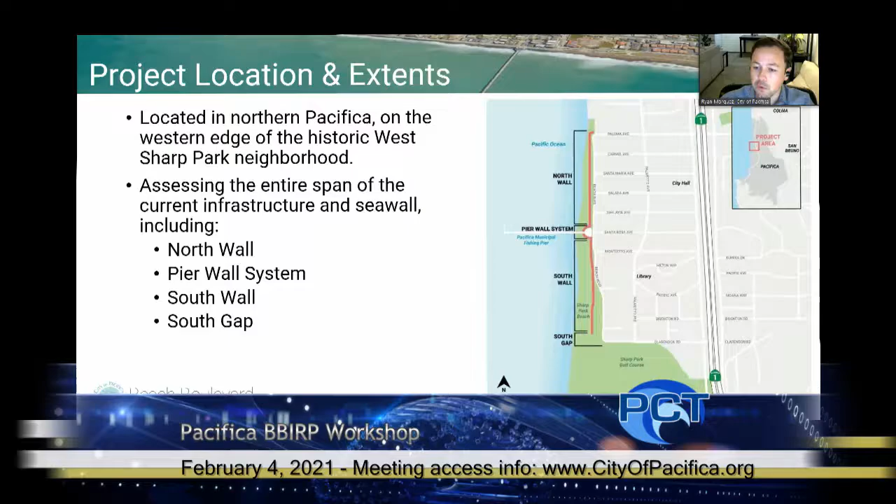Along that span there are four reaches, as we call them: the north wall, the pier wall system near the Chit Chat Cafe, the south wall south of the pier, and an area we call the South Gap or Clarendon Gap, which is without current protection, located between the south wall and the Sharp Park berm.

As a quick reminder of the project goals: to replace the current seawall and outdated infrastructure, to build resilience into one of the most vulnerable segments of the city's shoreline, to improve public access and use of Beach Boulevard and the promenade, and ultimately to create a multi-benefit solution to protect public infrastructure, recreational activities, homes, businesses, and the community at large from further coastal erosion impacts.

As a reminder of how this phase of the project is broken down: we are in the preliminary planning and feasibility phase, where the goal is to identify a preferred alternative. It's broken into three main tasks the team has been working on: reviewing the existing conditions of the site, looking at the hazards and future conditions, and using both to inform an alternative analysis where a variety of treatments for the area could be utilized.

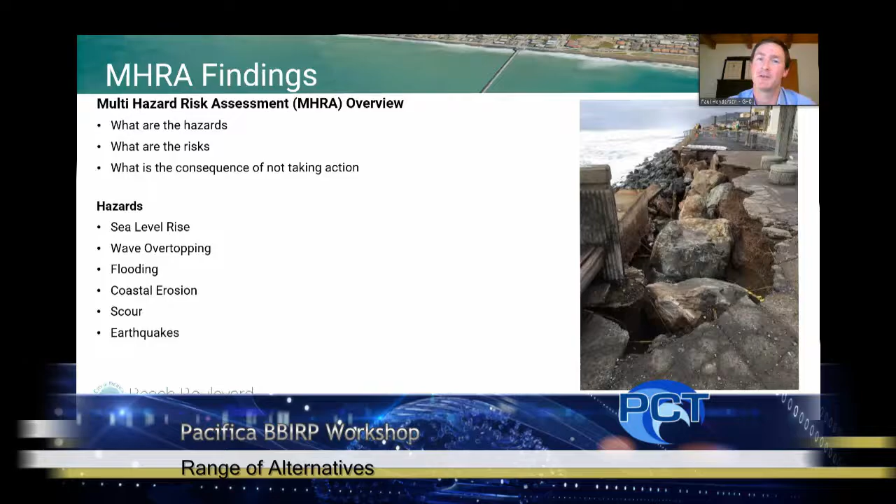Coastal erosion is generally caused by wave action, and we have examples on the bluffs to the north, where many properties have been removed over the years and the bluffs are clearly moving inland. Right now at Beach Boulevard, we have the seawall and a rock revetment, which is stopping coastal erosion from progressing. We also have scour, which is essentially coastal erosion but in the downward direction rather than inland. In front of the existing wall, the rock revetment is protecting us against scour at the moment. On top of these coastal hazards, we also have sea level rise to contend with, which is going to increase the magnitude of these existing coastal hazards.

We also have the earthquake hazard, of course. Pacifica is located in close proximity to the San Gregorio and San Andreas faults.

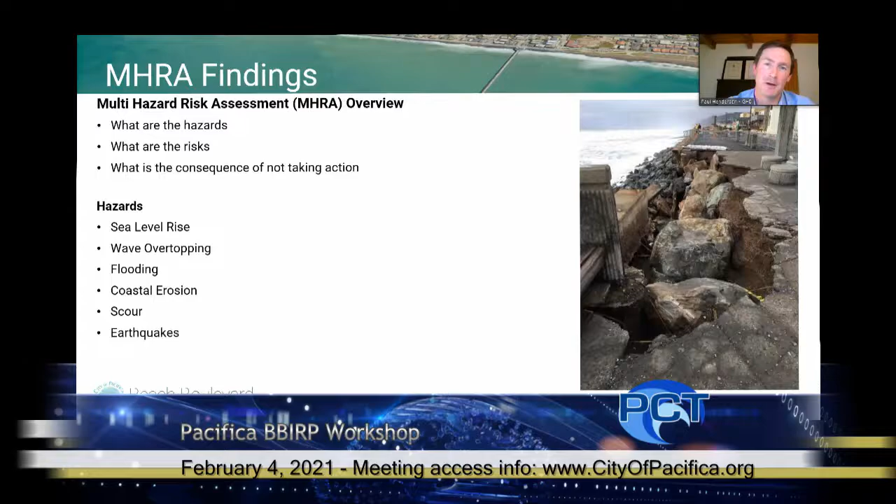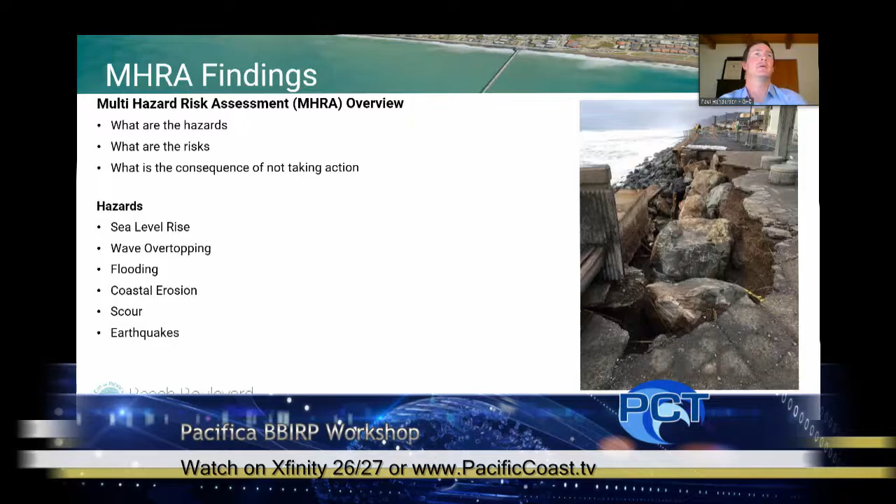The earthquake hazards specifically are physical ground movement or shaking, ground surface rupture, and soil liquefaction. So those were the hazards - that's the H part of the MHRA. We also analysed the risks of these hazards, which is the R part of the MHRA.

One of the methods we used to analyse the risks was to run a hypothetical scenario, thinking about what would happen if the current shoreline protection was not repaired or maintained from this point forward. We call this our no-project or no-action alternative.

What we found in this risk assessment was that if the Beach Boulevard shoreline is unprotected, we can expect the complete loss of Beach Boulevard by 2030, the loss of approximately 50 buildings by 2050, and the loss of more than 160 buildings by 2100.

We will also lose utilities and other infrastructure, which will require relocations, and of significance is the complete relocation of the sewer mains and pump station from Beach Boulevard to Palmetto. That would be a new pump station. There would need to be street reconfigurations and a number of other critical utility relocations.

And if the shoreline is not protected, we need to consider the pier also. Is the pier removed, or do we extend the pier landward as the shoreline moves landward? Ultimately, in our hypothetical scenario, we chose to analyse the removal of the pier sometime after 2030 because access from the shoreline would be gone, which obviously has significant costs both financially and socially if we were to remove the pier.

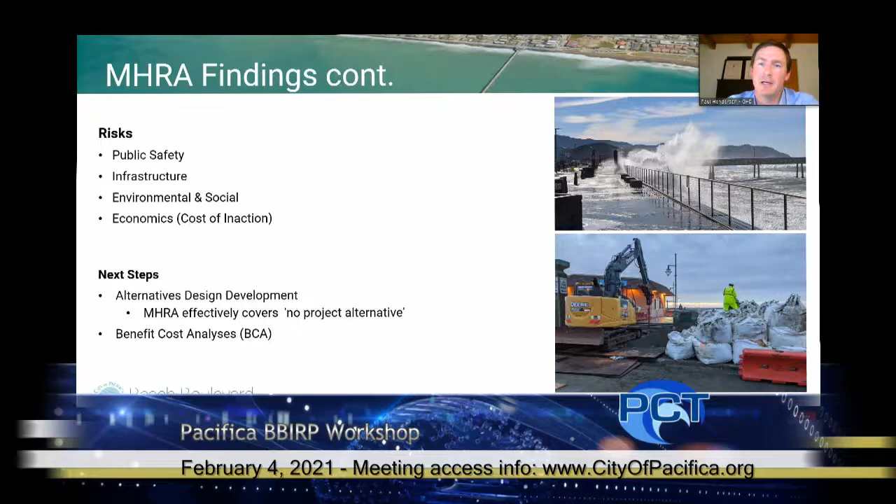And will it increase the recreation space? Will it improve the other social and environmental aspects? We'll be running a benefit cost analysis on each of the alternatives, and that'll be used as one of the tools to compare the alternatives against each other in our formulation. But I don't want to encroach on Gillian's presentation, so I'll hand you over to her to present the design alternatives and how we will assess them.

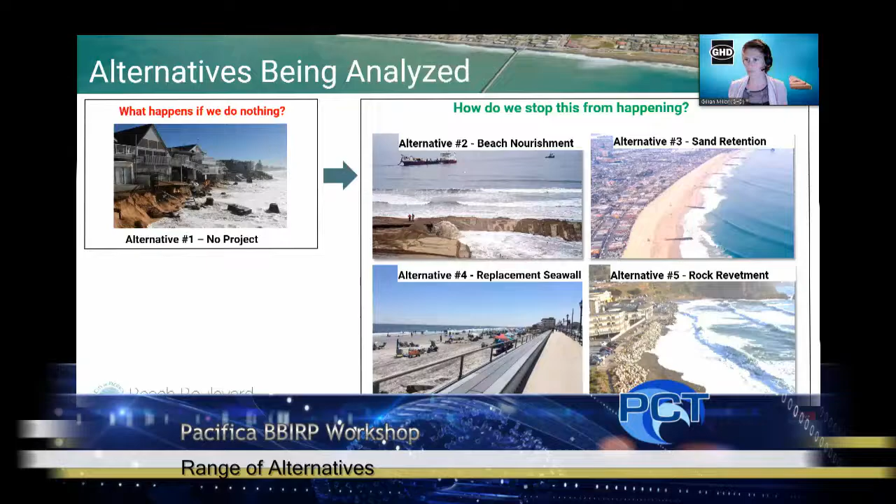I'm a maritime and coastal engineer, and I'm going to take us through these next few slides, talking about how we bracketed the alternatives, including no project, which Paul has just taken us through so well. What I want to emphasize is that we're not considering these options in isolation or in a vacuum. They are interactive, and there are elements of one that may come into the other.

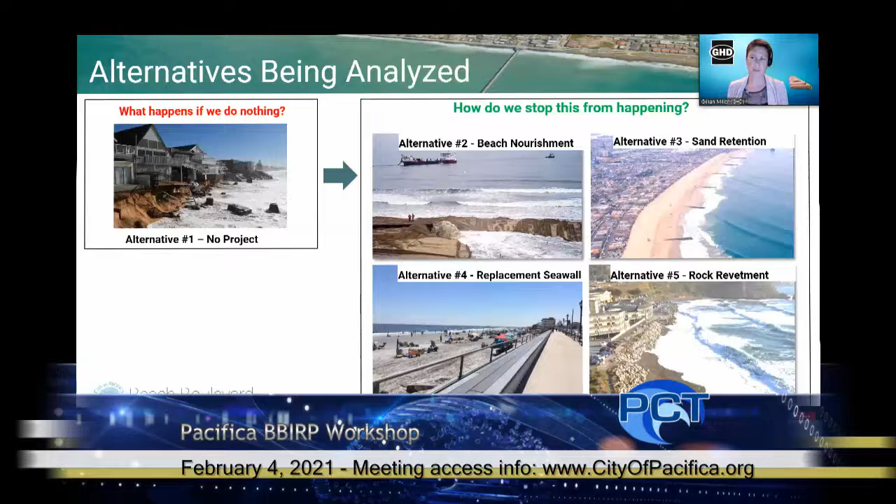For example, we've got beach nourishment and sand retention structures. There are options, and as we look at these, we can consider all the different ways in which nature-based solutions and living shoreline concepts can be incorporated into these broad categories. So we are breaking them down, as you see there, but I want to emphasize that they're not in isolation, and we don't just see one as a definitive, that's what it is.

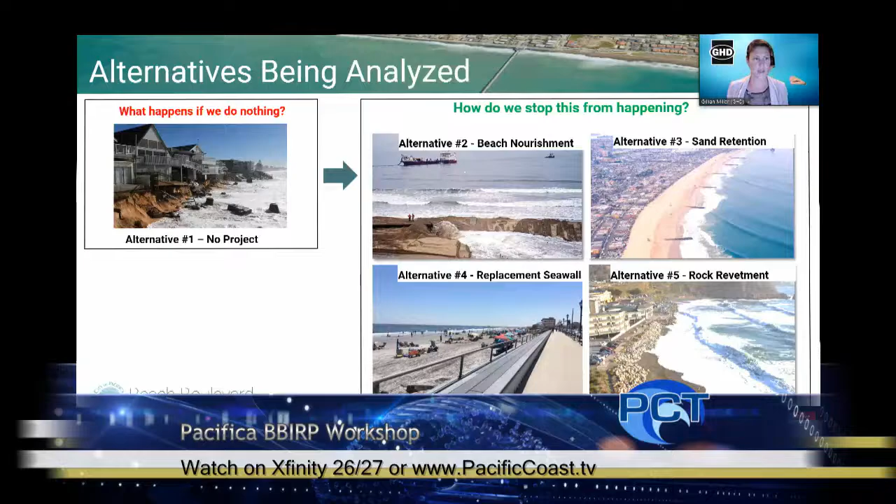Coastal defense for Pacifica is all about risk management, right? And it's about evaluating the feasibility of those alternatives. Next slide, please.

Before we dive into those, I really want to note the evaluation and selection criteria. What matters? It's set for technical performance, which, that's it for people like myself, engineers - that's where we feel most comfortable. But there's of course other selection criteria that are just as important.

Number one there, of course, is cost. It matters, right? It is a consideration. It really does matter, not just the capital cost of installation, but that whole of life cost - what it costs to maintain, what it costs to keep coming back to. That's very important for the planning, the feasibility, and I'm sure it's very important to you all.

Safety, right? Safety is something that we all take very seriously, I think, especially these days in the strange world that we're living in. And that's everything from pedestrian safety, vehicles, that you still feel safe to access your public spaces and your frontage.

Environmental resource protection - it's a shared space, right? Our coastlines are shared spaces that we have to respect and consider. We consider our environment in everything that we do, and it is an element that we have to take very seriously. As we look at 4 and 5, public access, recreational value, the culture of the frontage - these are things that do matter. How you use the frontage, what's important - this is an element that we think about.

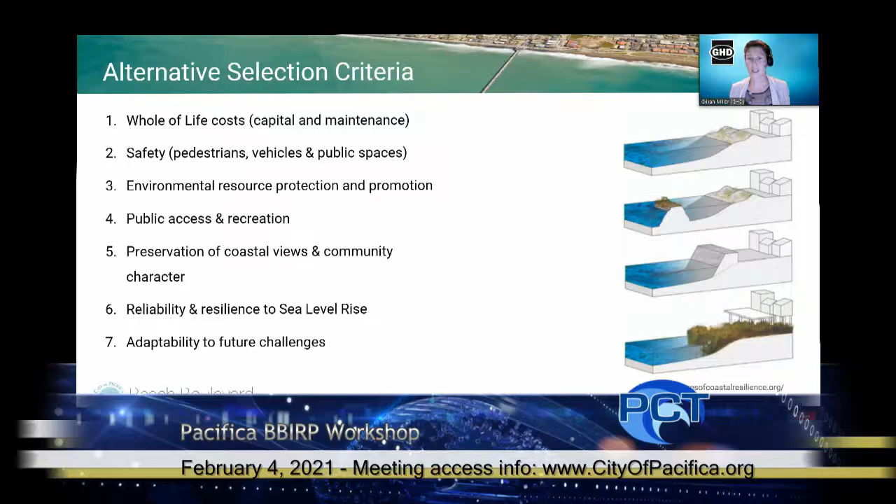And the last two there really tie in together with reliability and resilience - resilience to climate change, adaptability to future challenges. I mentioned before, on one of the questions, long-term climate resiliency at lowest cost. I think that really is what those two bullet points are: reliability and resilience - how do we look not just to tomorrow, but to years to come, and what that looks like, and how this project will react and adapt to that. Next slide, please.

So I think, Gillian, this might be time for our first poll question. Super. I'll tee it up, and I know this is a lot of information to digest, so I'll remind that the poll question is meant to get your initial feedback on what Gillian just reviewed. If the poll question can come up now, we'll keep this slide up. The question is, which of these alternative selection criteria are of most importance to you? Which are speaking to you the most after just hearing the definitions and overview from Gillian? And if you could choose up to 3.

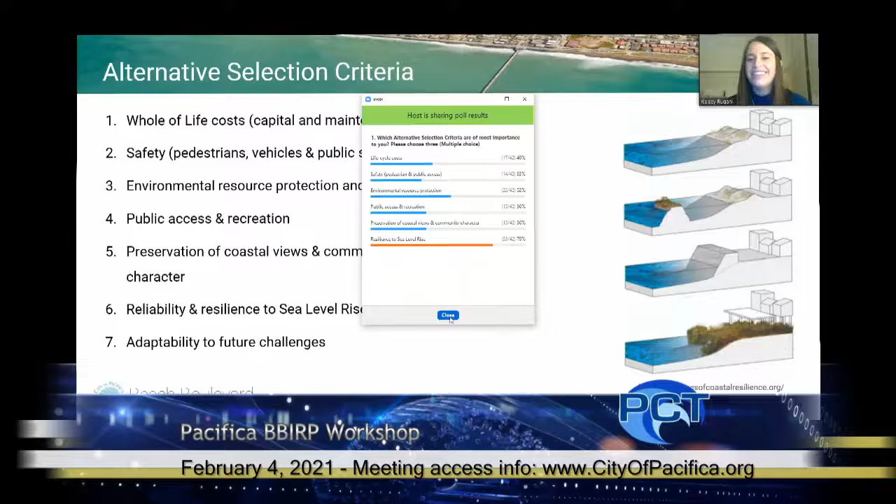What we're seeing is a little bit of a spread throughout, with resilience to sea level rise coming in with the most at 79%. The next is environmental resource protection, and I saw that one got the first vote - it went right over all the way in blue. And then kind of a mix between life cycle costs, safety, public access and recreation, and preservation of coastal views and community character. Thank you so much, everyone, for the quick input on that. Okay, Gillian, keep going.

No worries. We'll slide on to the next one.

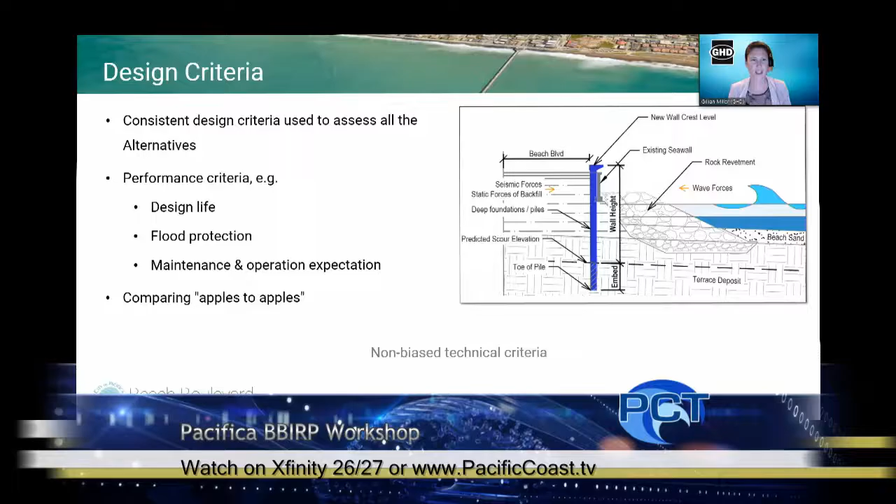Okay, back to maybe where I'm more comfortable on the technical side of things with design criteria. Design criteria is that definition of common goals and technical performance requirements. Really about the technical side. Most importantly, a consistent criteria that we can use to evaluate all of the alternatives. I've got it down at the bottom because I want to emphasize that, a non-biased technical criteria.

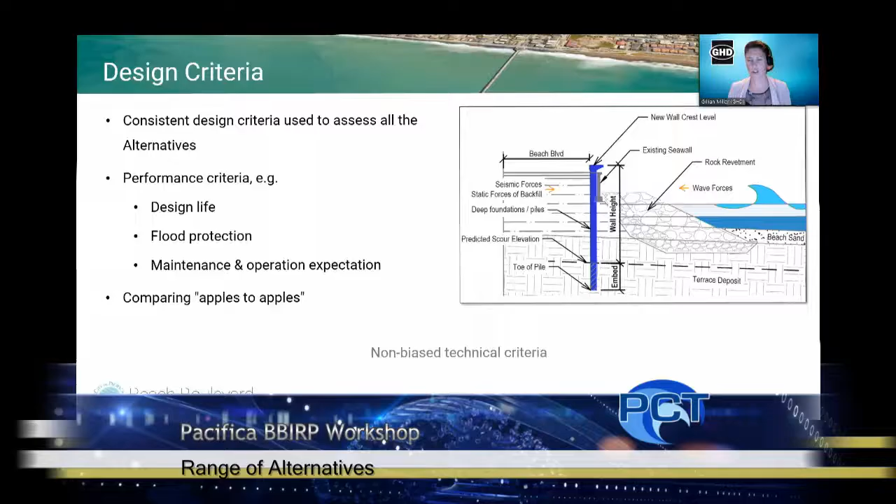That performance criteria, things like design life, how long does this have to last? What kind of protection are we talking about? What are the maintenance and operation expectations? You don't build infrastructure on the coastline and just walk away. We're always delaying and moving forward, it never stays stagnant. So these are very important, the design criteria, and it allows us to compare those apples to apples, a beach nourishment scheme to a wall. It's very important that we have that consistent criteria.

So next slide, please. Okay.

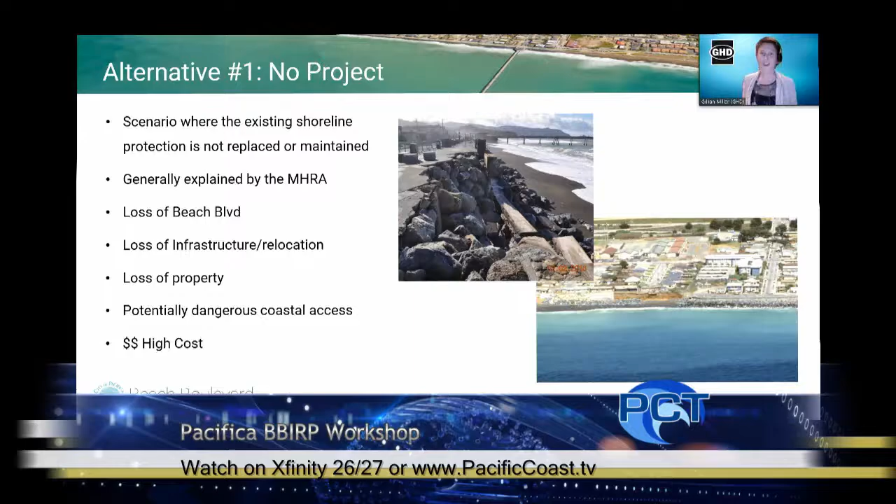First alternative, no project. I think Paul took us through very well, very concisely, what no project looks like, right? I don't think we're speculating these days. There's no mystery to what might happen to Beach Boulevard if there is no project. I think this winter has shown, amongst other events, what that really looks like. So looking forward, I think we can move straight off that slide and on to the next one.

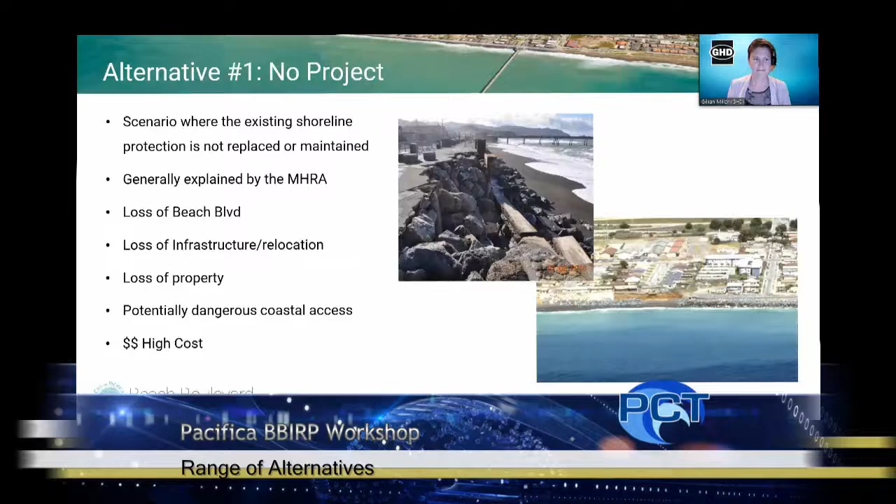Undoubtedly, the biggest pro of a beach nourishment scheme is beach access and recreation. I think that is the vision of California, that we have these nice wide sandy beaches. You can walk your dog, you can access it with your family. There is no doubt that that is the biggest pro, I believe, for beach nourishment.

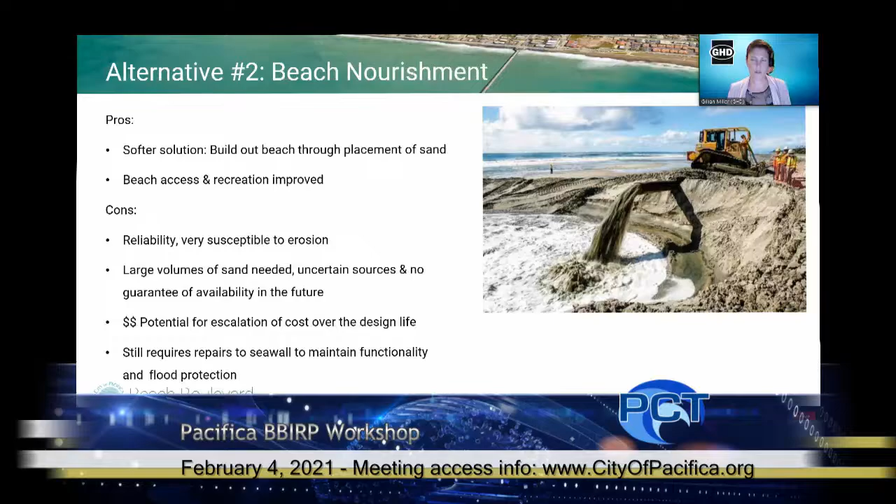Some of the disadvantages, some of those cons, are unfortunately more on the reliability side of things. Of course, it's very susceptible to erosion, particularly for places like Pacifica, where we have a very aggressive wave climate. There's very large volumes of sand needed. There is uncertainty in where this sand comes from, particularly looking forward into the future. I think that poll was fantastic, it said adaptability to climate change and resiliency. That's sometimes where beach nourishment is a little bit of an uncertain one. Where might that material come from in 5 years' time, 10 years' time? And that also can, of course, lead to cost. So there is a very high risk of escalation of cost over the design life, especially when you're looking at a very high maintenance option where you know you're going to have to come back and maintain this.

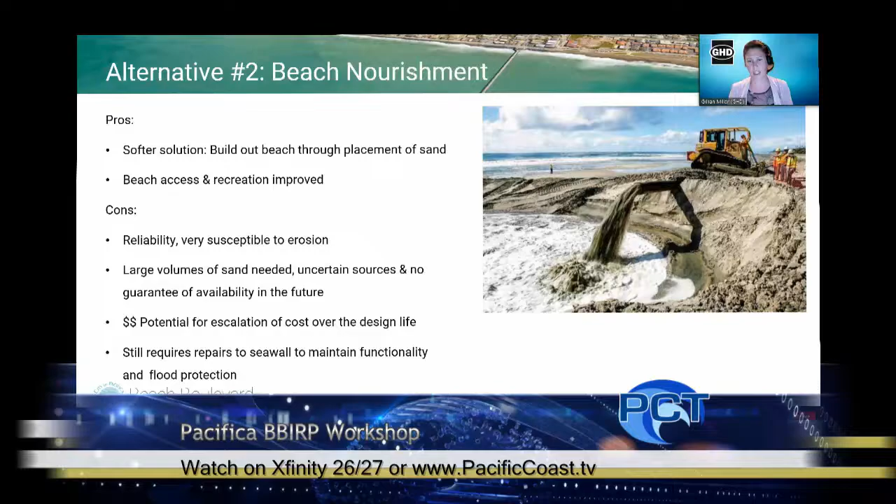And just the last note is, even with a beach nourishment scheme, we would still require maintaining that functionality and the flood protection at the back of the beach. That would still require repairs or replacement of the seawall elements, so that we are creating that separation and that useful side from the promenade. Next slide, please.

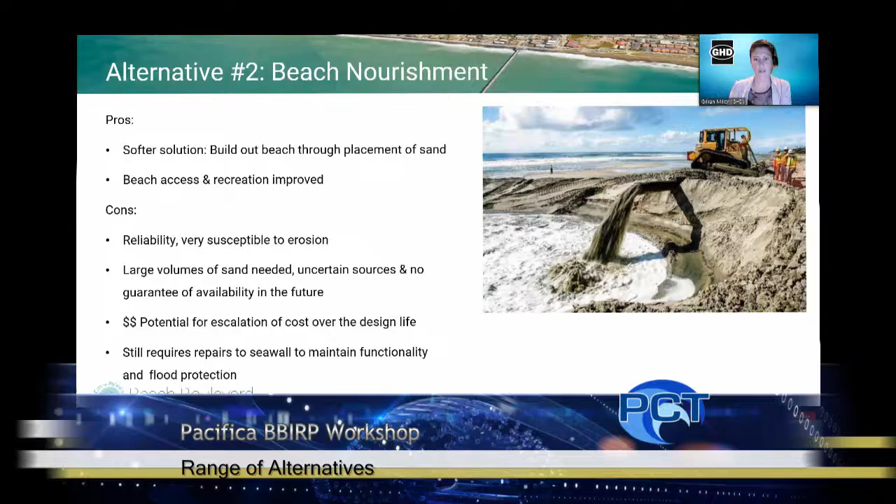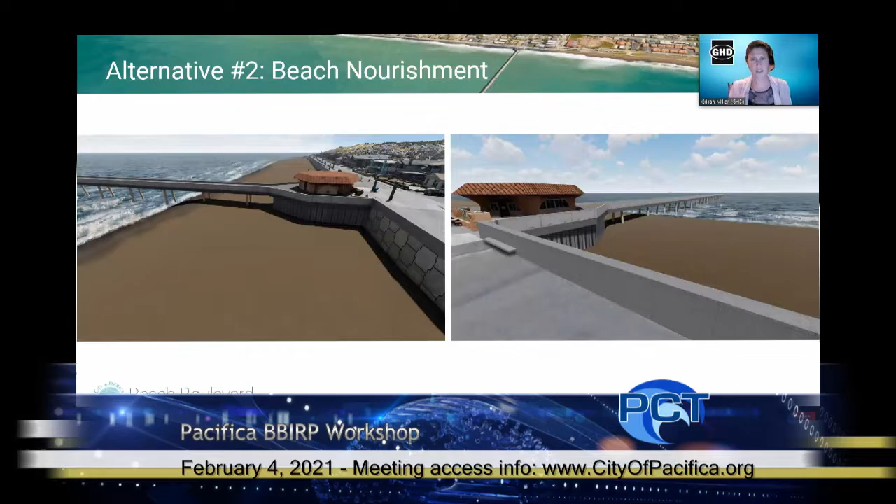Okay, so these are our renderings, showing you what it might look like. Just to emphasize the wave climate we're looking at, of course that's a nice day, right? It's sunny, we're enjoying the sand, we're looking down from the promenade. But of course you can immediately feel the value of a beach nourishment scheme, I don't think that's lost on anyone. But it's what that looks like on a very stormy day, what about the storms that are coming in the future? So I think that's one we have to keep in mind with beach nourishment. So on to the next slide, please.

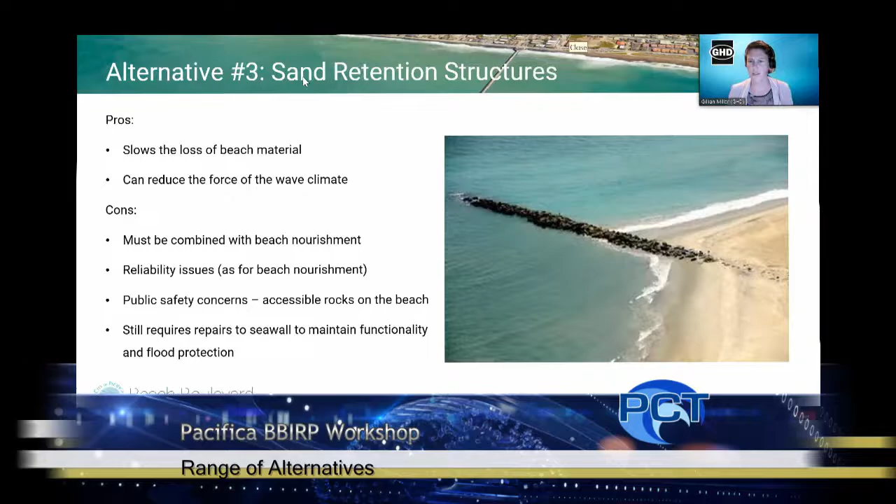Just to say, we are thinking along all of those lines - it's not just groins on the beach and that's the end of it. On the pros side, I also put that second bullet point: they can potentially reduce some of the force in the wave climate. The word I wanted to use was attenuate, but I've been told that's not a common usage word, so we're going with reducing the force.

It's a bit of a caveated option there, because sometimes on aggressive coastlines like we have here, putting structures in the water can actually create different currents and eddy situations that can sometimes be dangerous or undesirable. So that pro I'm going to sit a little bit in between the pros and cons.

That would be very much as we move forward with the technical analysis and modelling, should we proceed with this option. Some of the disadvantages: it has to be combined with beach nourishment - you have to have sand to actually retain, which touches back to cost. So here we're looking at beach nourishment plus sand retention structures. How that cost-benefit works out - if you can retain more, if you don't lose as much, you don't need as much sand, but of course you have the additional cost of the retention structure itself.

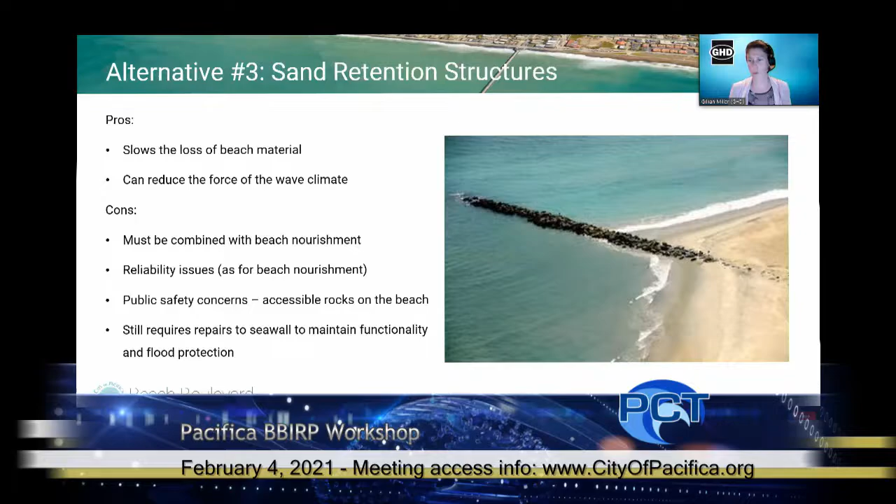We touch on reliability there with the beach nourishment - it's very similar. Even though you're potentially having more protection or able to keep more material there, there is a reliability issue. That superstorm, that very large event, could come in and can actually strip down and denude your beach.

There are always sometimes public safety concerns. I've seen this a lot in the past where there are structures on the beach that haven't been there before - I know there's of course the rock revetment you guys are familiar with, but sometimes the public safety, whether it's the currents or having large armor stone or something similar on the beach, can be a concern. And then that last bullet point, same as the previous slide: you still require that seawall or repairs to the frontage to maintain that functionality.

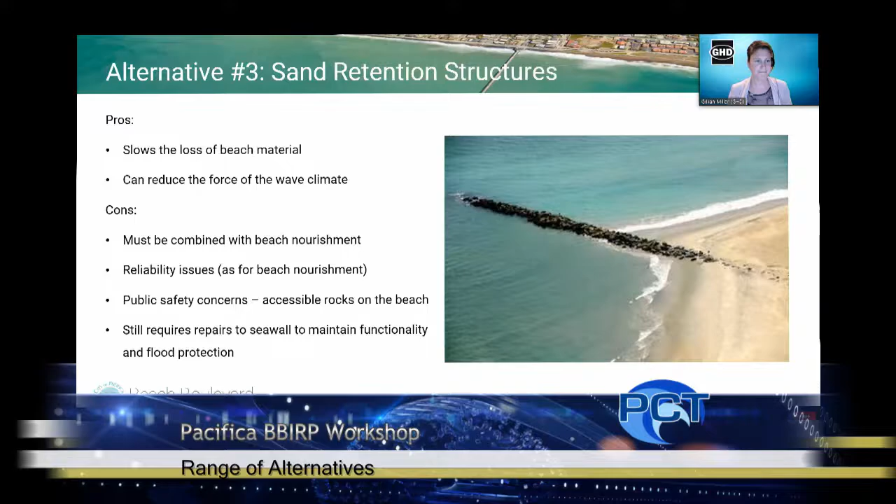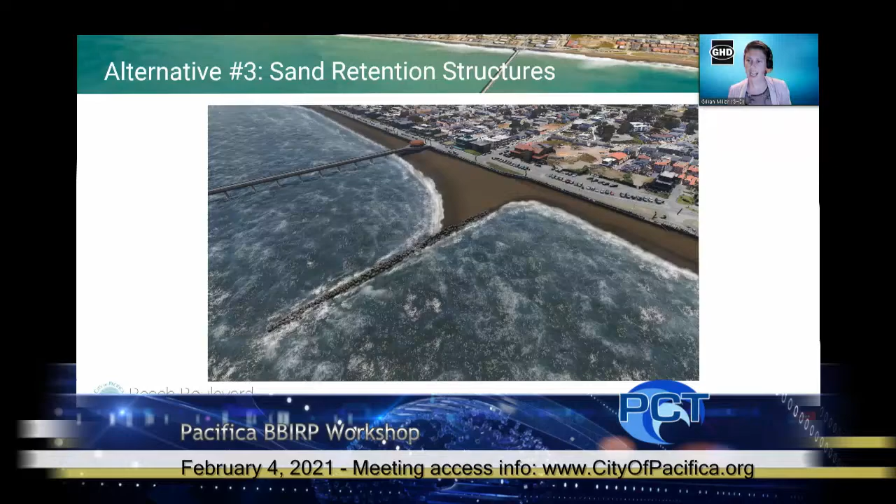In the design process, what we look at is the shape that it forms, and we predict the spacing that's needed, the crest height of the groin, and then the length as well, which then has an effect on that shoreline shape. But it's something to think about when we're looking at our options - you need to make sure it doesn't cut back too far and you get a pinch point on your beach. So this all goes into the technical feasibility side of things.

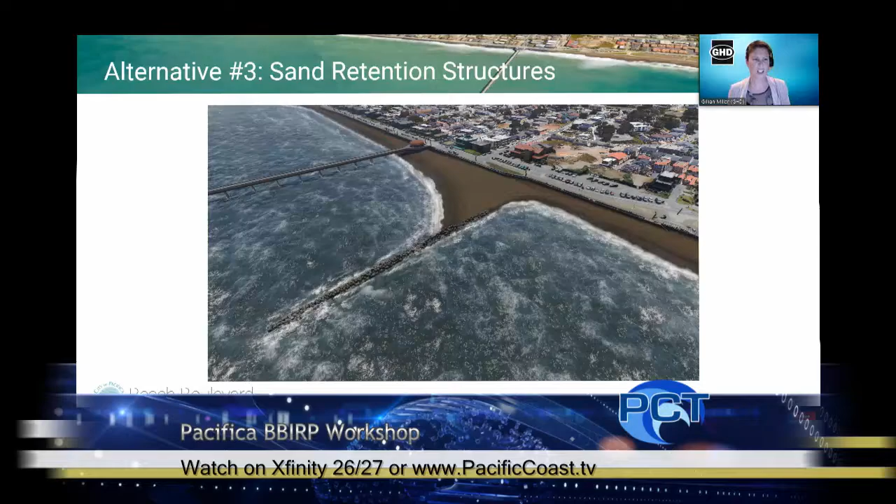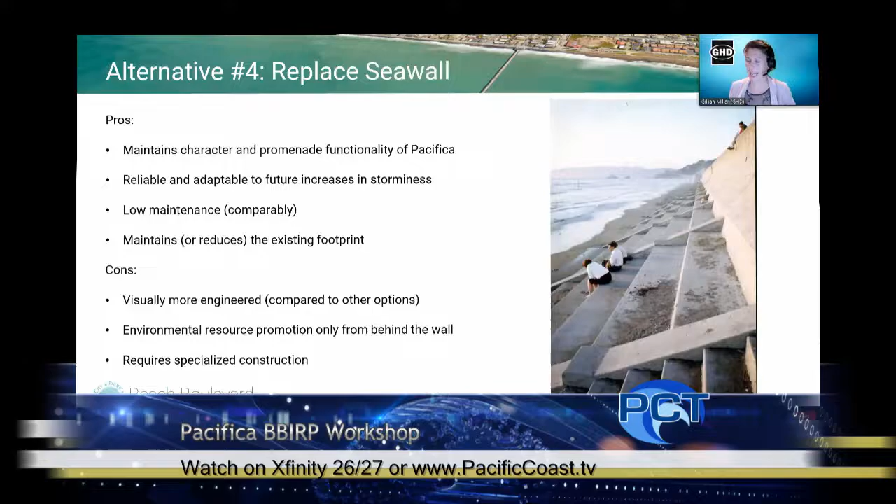Some of the cons are, of course, it's more visually engineered. It's a wall. There's lots you can do on the cladding, on the incorporation, particularly behind the wall element, where we can look a lot at environmental promotion and habitat enhancement. There's a lot that can be done behind the wall in terms of making that connection through to the seafront, making this a useful, green, enticing space. So although it has a very engineered feel, it is a wall, there's a lot of opportunities behind it.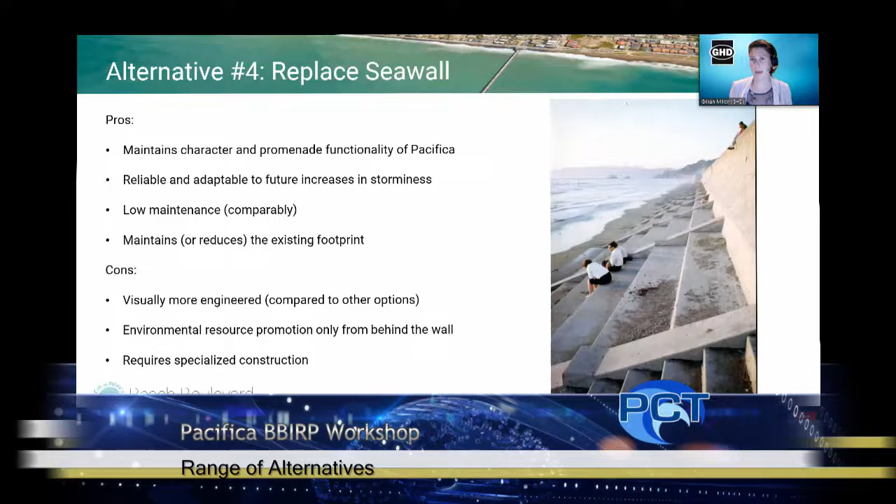The last bullet point is that it requires specialized construction. To explain that better, this is an aggressive marine environment, and construction of these types of walls requires a very experienced contractor in this type of construction. That puts some limitations on it, meaning you're looking at a pool of marine contractors as opposed to simpler options. But it should be viewed holistically.

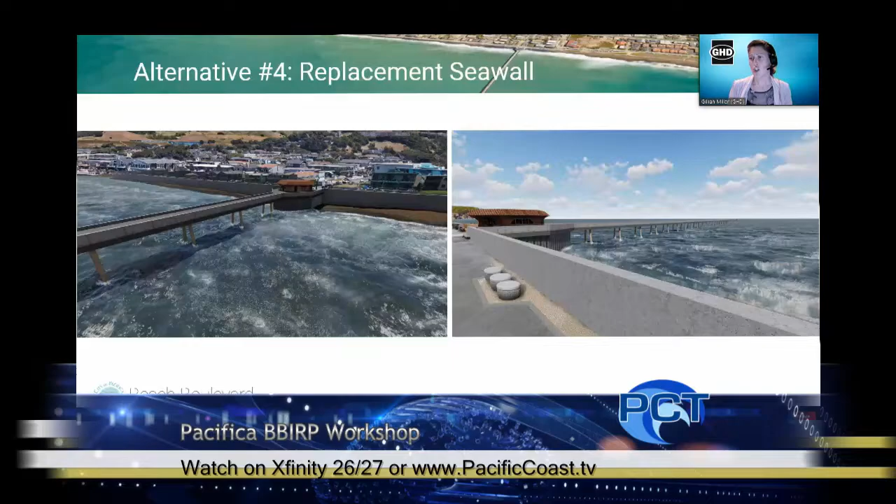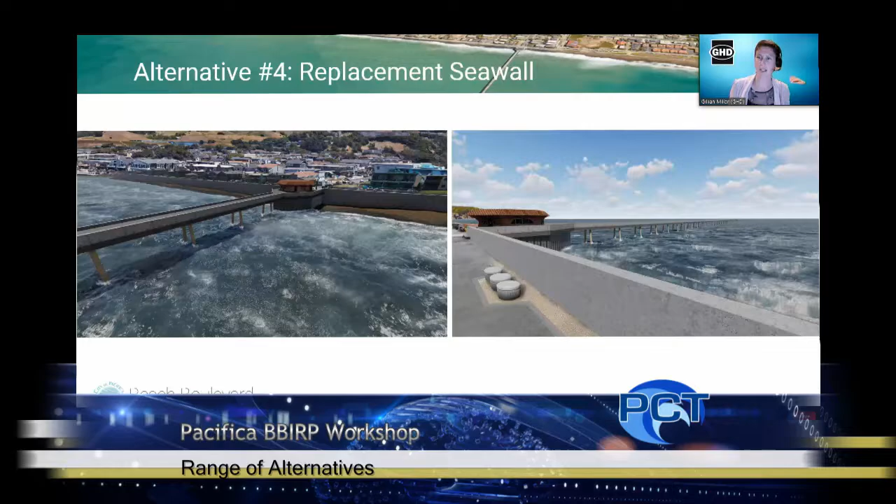Okay, next slide please. On our rendering side, I think that really gives you the feel. It's probably not dissimilar to how Pacifica has felt in the past, maybe in some of the less vulnerable situations. You have the connection to the water, you're able to see out, you're able to access your frontage. As we progress through these slides and get onto later ones, we'll look at what that might look like on the land side, looking out over the water.

Rock revetment is the last of our broad brush alternatives. One primary pro is it's a low-tech option, relatively simplistic construction. Although, as an engineer, it's very important to have a contractor very familiar with this, because the types and sizes of rocks we're talking about are very large, and these have to be placed appropriately and correctly.

With rock revetment, it's very adaptable. It can be increased or added to over time, as you lose material or as sea levels rise. It is low maintenance, the least of all the options, even including the wall. When constructed and designed correctly, designed for future scenarios and not just for today, rock revetments can be incredibly low maintenance.

Some of the cons are very much on the technical side, along with other cons we looked at earlier. It is a permeable option, right? Water moves through the rocks, particularly these large armor rocks. So it does require work on a wall behind the crest to alleviate flooding, and that's typically a seawall, not dissimilar to what Pacifica has at the moment.

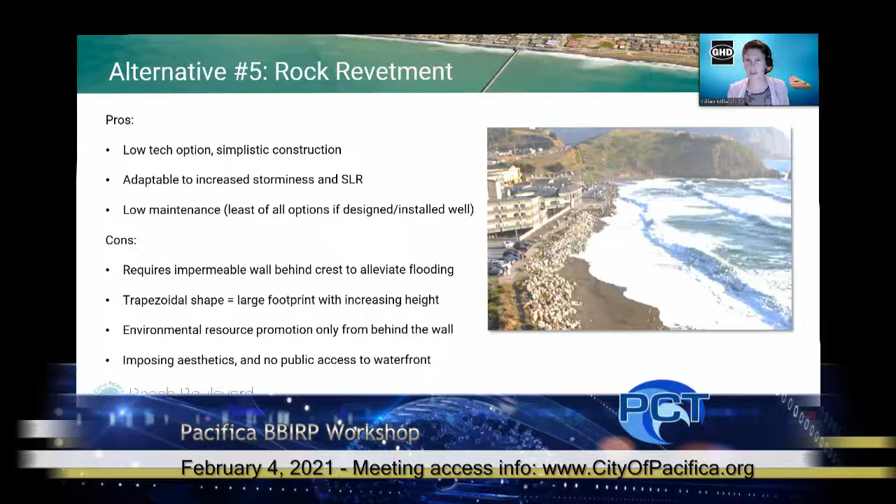So from a cost aspect, you require the wall anyway, but with the rock armor in front of it. It's a trapezoidal shape, which means as you increase in height, you also increase in footprint. So it can take up a lot of your land, whether that's beachfront amenity value or the environmental side. As you go higher, you also go bigger.

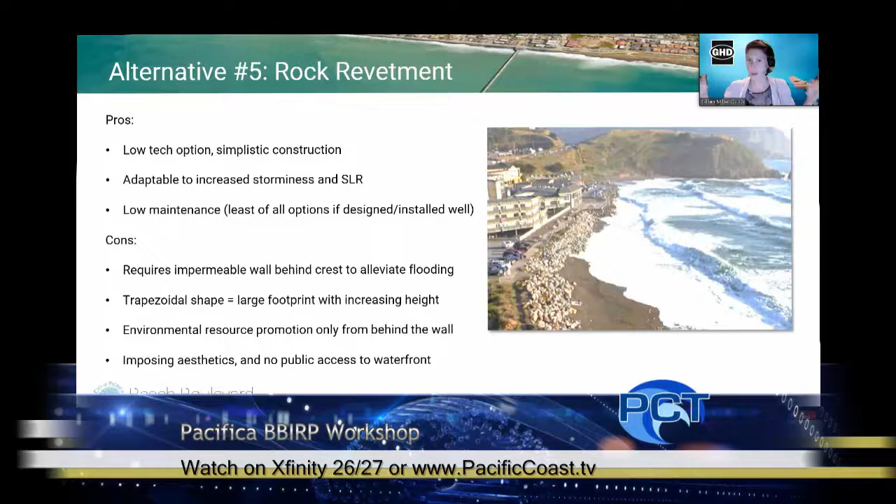So on environmental resource promotion, similar to the seawall, there are opportunities behind the wall to bring in that green space aspect, but not a lot on the beach side. And the last point is aesthetics.

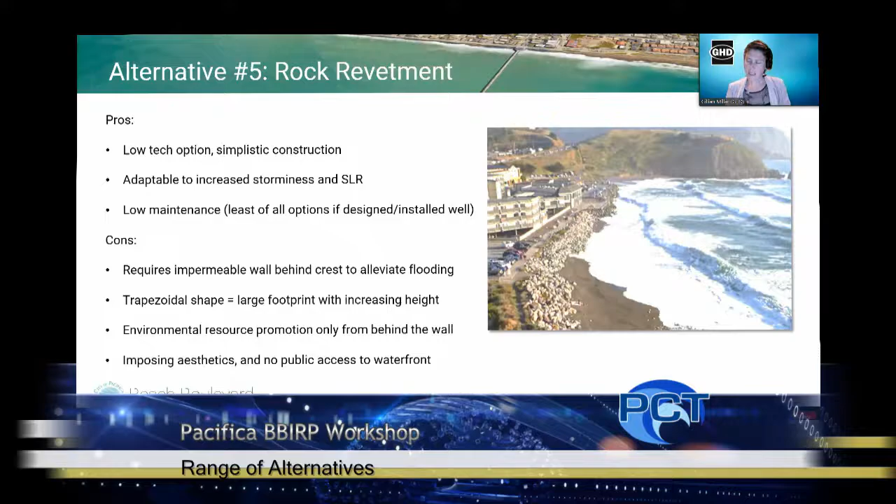If we slide to the next slide, we'll see the rendering. I think that's one of those things noted a lot with revetments - not everybody loves rocks, I'm a geeky engineer so that's okay for me. But it is a very imposing view, and it creates a very physical barrier between the frontage and the waterfront and your access. So there's an element there that could be a less desirable look.

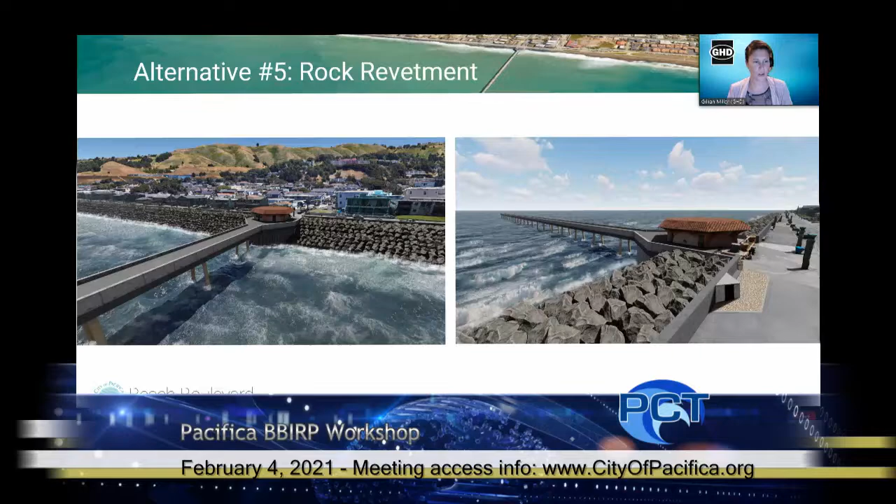Okay, next slide please. Now we come back full circle to this concept of composites - although I've broad brush described these different alternatives, they are not in isolation, right?

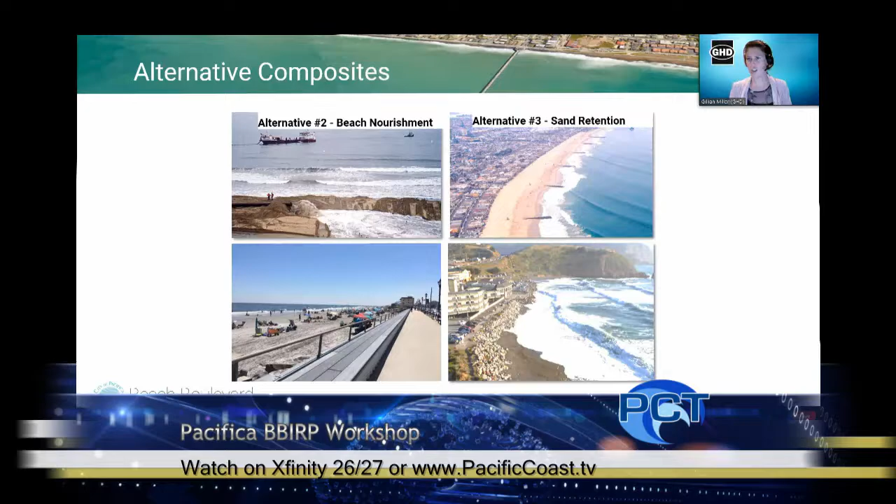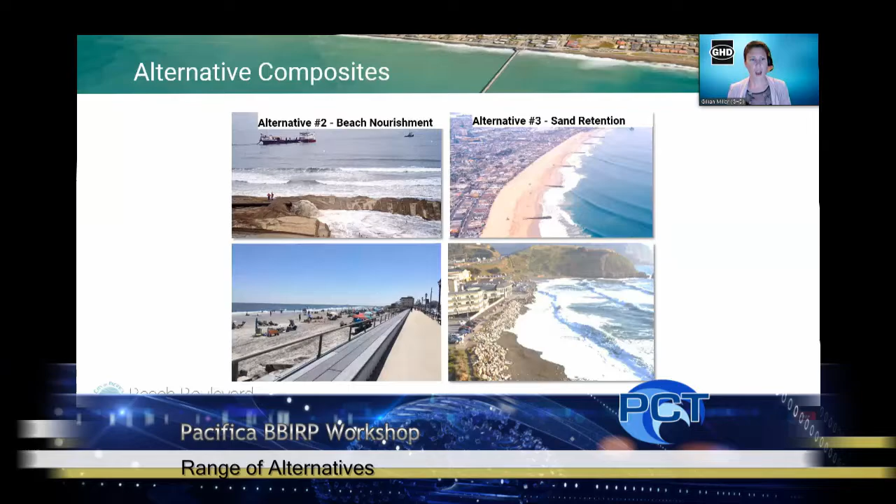Whether we're talking beach nourishment with sand retention, whether we're talking about a seawall, maybe it's a smaller seawall combined with a rock revetment, they are composites. By breaking them down and looking at them individually, we can also look at the pros and cons of each and the technical feasibility of all of them. The ability to bring in those nature-based solutions, looking at climate change resiliency, that matters in each one of these in a slightly different way. And that's why we want to make sure that we're always thinking about it in terms of composites and various different options.

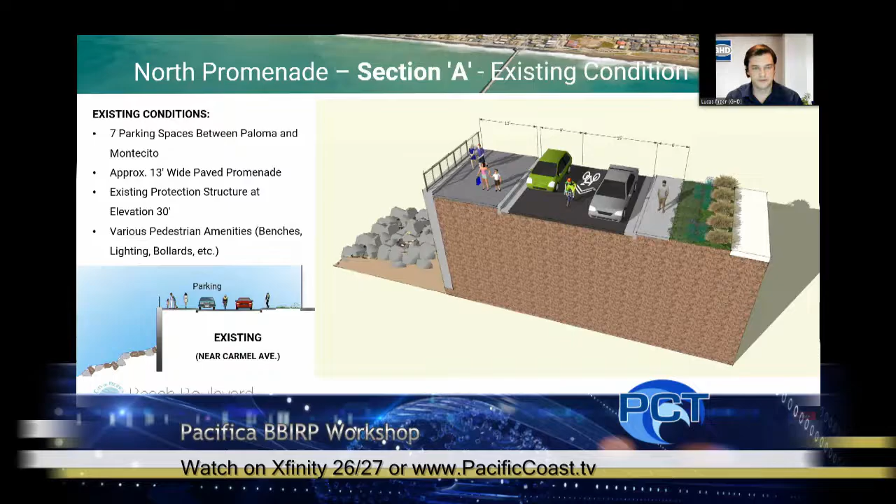So this is section A, showing the existing conditions, up by Carmel Avenue. Under the existing conditions, there is a combination of parking, paved promenade, and various amenities.

Currently along Beach Boulevard from Paloma to Montecito Avenue, there are approximately 7 parallel street parking spaces. The promenade width varies from approximately 13 to 21 feet, depending on parking and location along the corridor. At section A here, we're showing a 13-foot promenade, street parking, and a single travel lane.

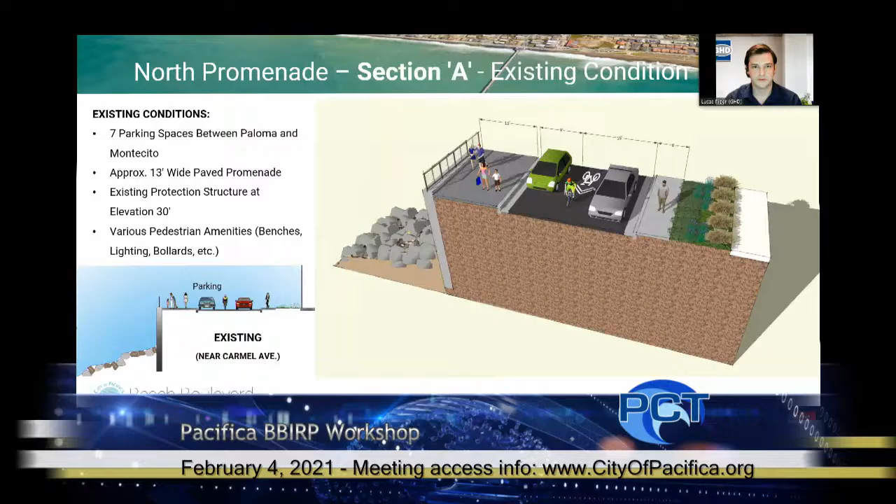You'll also note that in section A of the North Promenade, we're showing the current crest elevation of the existing shoreline protection structure, and we'll be showing that same elevation in the proposed conditions as well. As we get down to section B, we'll be showing what it might look like under an elevated seawall condition. So if we go to the next slide.

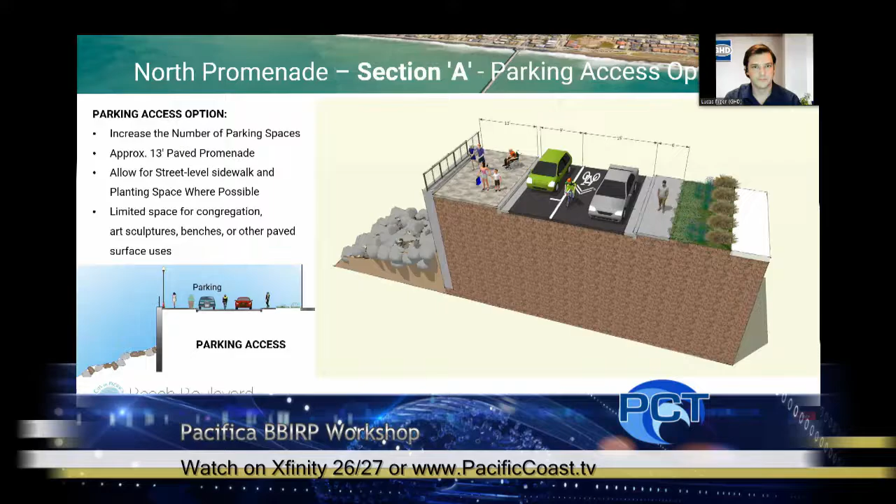For this section A, for the proposed parking access, the shoreline protection structure is shown at its current elevation, as I said, and you can see in this 3D view that under this option, parking is given top priority. If this option is the preferred alternative, it will show increased parking and access to the promenade through sidewalks and ramp connections. At this section location, this option would look very similar to current conditions, unless the seawall is the preferred alternative and that wall rises, in which case we'd have some elevational difference to make up.

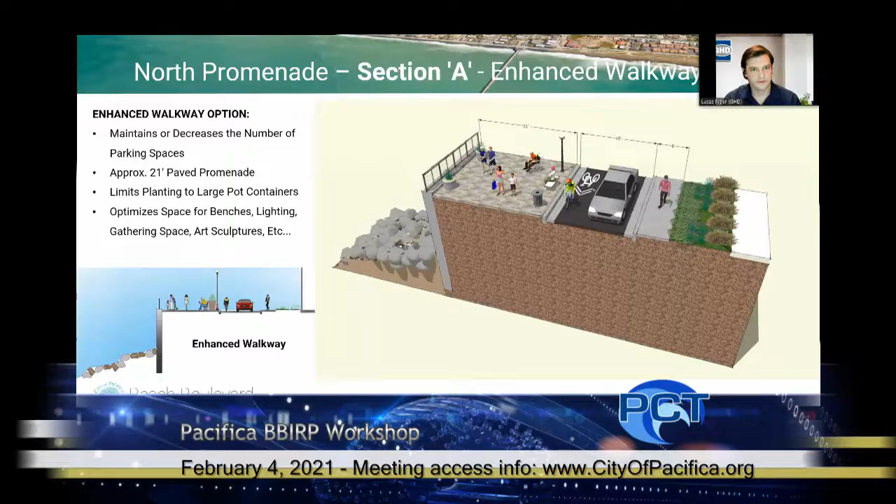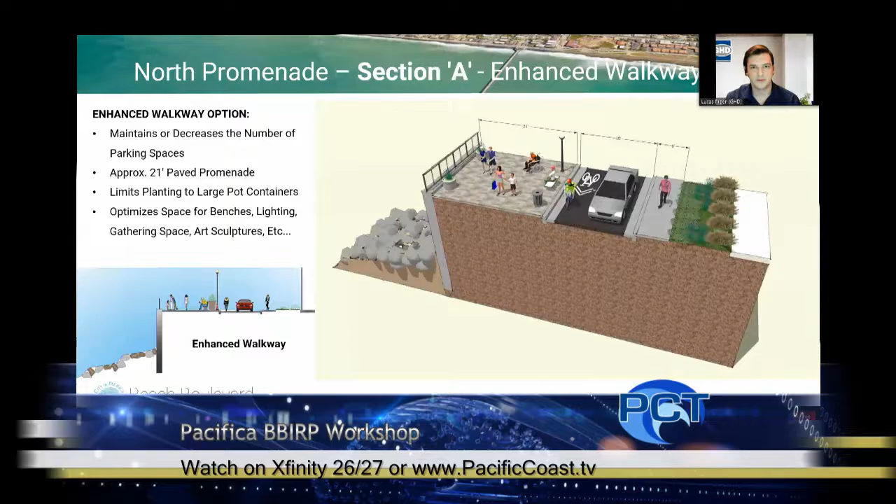Under the enhanced walkway alternative, this is really optimizing the paved surface for pedestrian recreation. If this option is favored over the others, the preferred alternative will include more paved promenade surface, and parking may be relocated or potentially reduced at their current locations. At this section cut, this option would remove the existing street parking and allow for a much wider 21-foot paved promenade, providing more space for pedestrian level amenities.

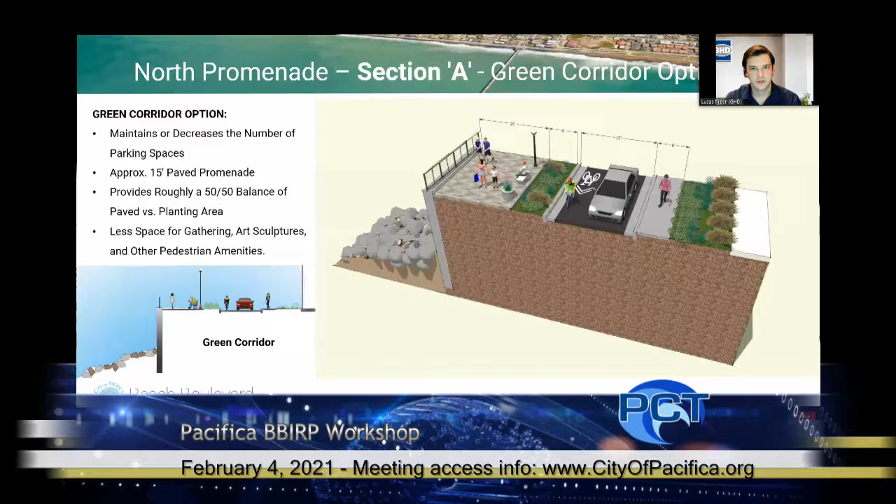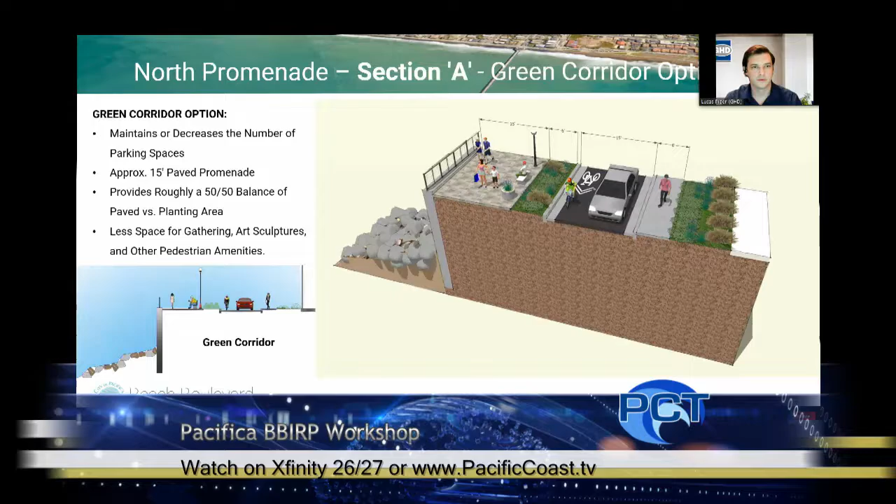This is showing what we're calling the green corridor option, which balances planter space and pedestrian paving. Planting would use native and coastal appropriate plants, such as coastal strand community grasses, herbaceous plants, and small shrubs. Trees are not recommended due to the high winds expected at this location. If this option is favored, the preferred alternative will allow for more planting areas, and similar to the enhanced walkway option, parking may be relocated or reduced. At this section location, this option would remove the existing street parking, provide a 15-foot paved promenade, and allow for buffer plantings between the road and the promenade.

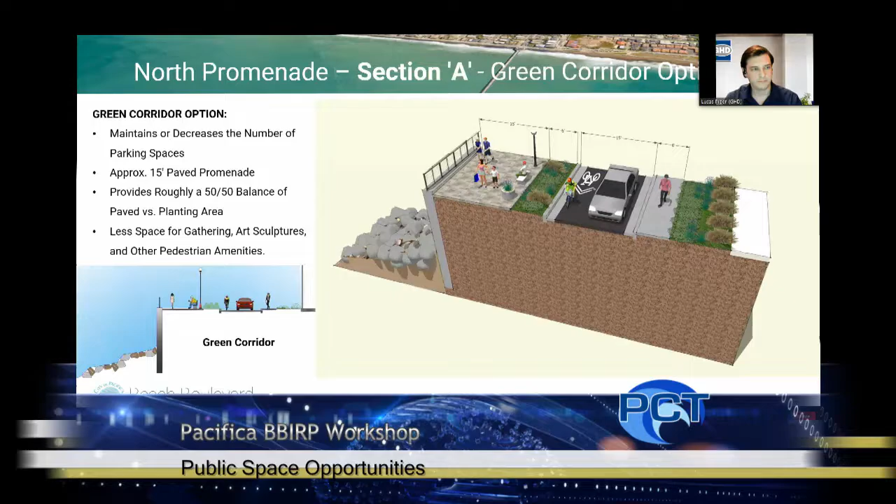Moving down further south, this is section B, near San Jose Avenue.

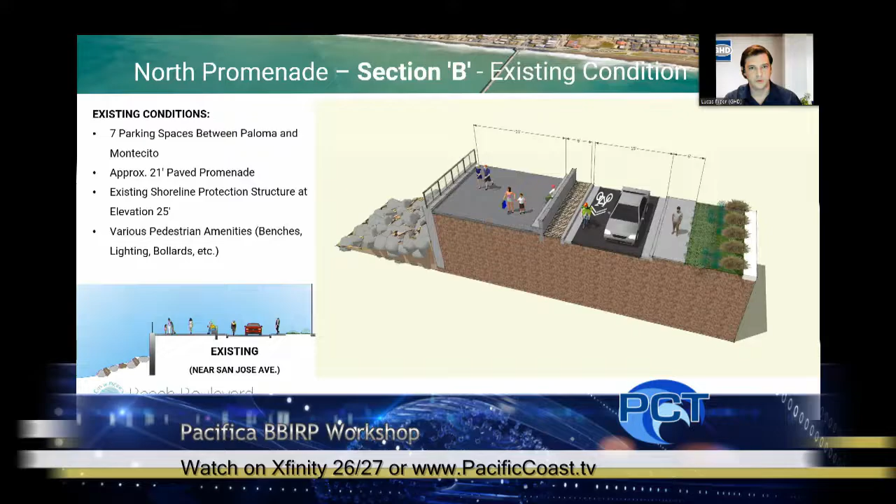This shows the existing conditions of an approximately 21-foot wide promenade, built-in seating, and a single travel lane. There's no parking currently at this location where this section was cut through. It's also important to highlight that under current conditions, the existing shoreline protection structure is at an elevation of 25 feet. This is showing the existing condition of that seawall, which is roughly 5 feet lower than the existing shoreline protection crest elevation shown in section A.

Moving forward with the proposed options for section B, as I mentioned earlier, the shoreline protection elevation will be shown higher than it currently is—matched to the elevation shown in the north—just to give you some idea of the elevational difference between the existing roadway and the elevated promenade.

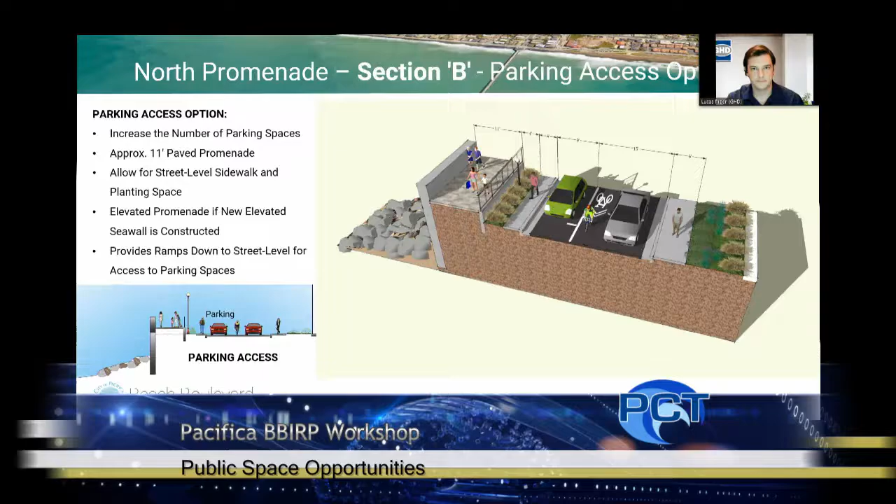Going through the same options here, the parking access option at section B is similar to the one up north, in that increasing parking is a primary objective. Please also notice the difference in elevation that I keep bringing up, which would need to be accommodated for. At this section location, this option would add additional street parking, allow for an 11-foot promenade, a 4-foot wide planting buffer, and a 4-foot wide sidewalk for street level connections to the paved promenade walking surface above, by that new seawall elevation. What is not shown in this 3D perspective are the ramps that would need to be provided to allow access from the lower parking to the upper promenade. Access between street elevation and the upper promenade at this location would be a common need throughout the next two proposed options.

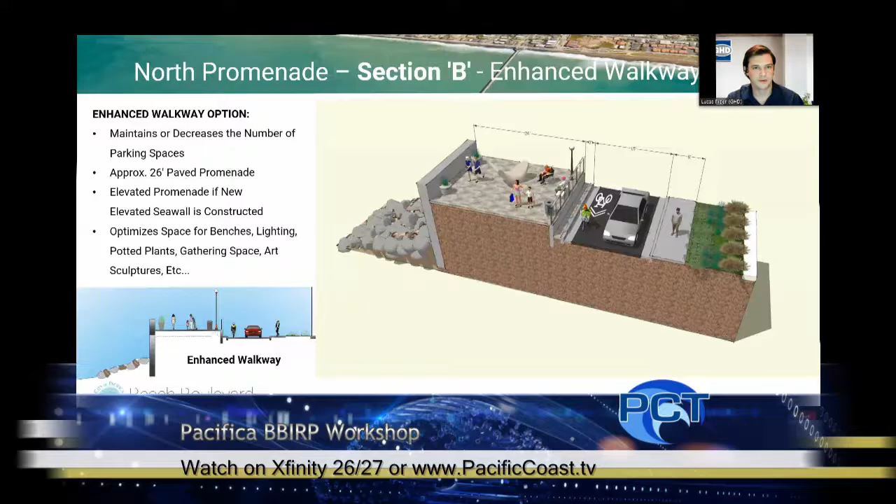This is looking at the enhanced walkway, again focusing on optimizing the paved pedestrian recreational surface for the promenade. At this section location, the option would allow for a 26-foot wide paved promenade. This widened promenade would allow for a multitude of pedestrian amenities, such as public art sculptures, benches, potted plants, lighting, and a host of other options.

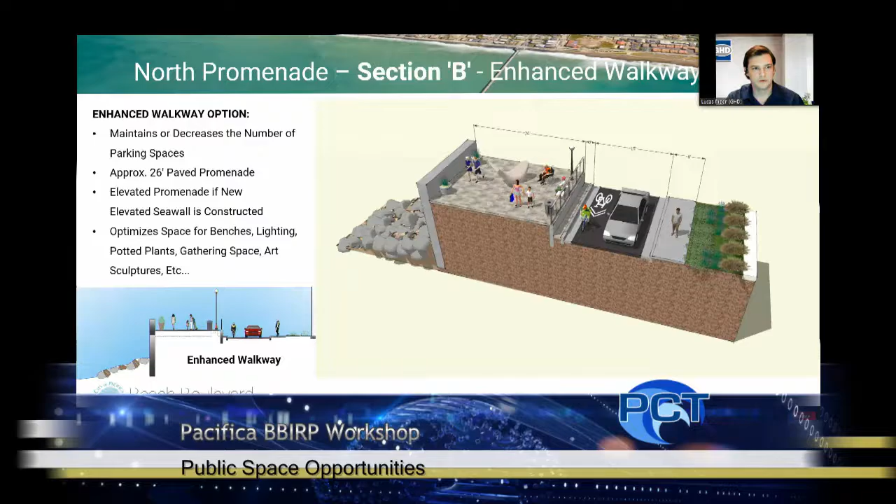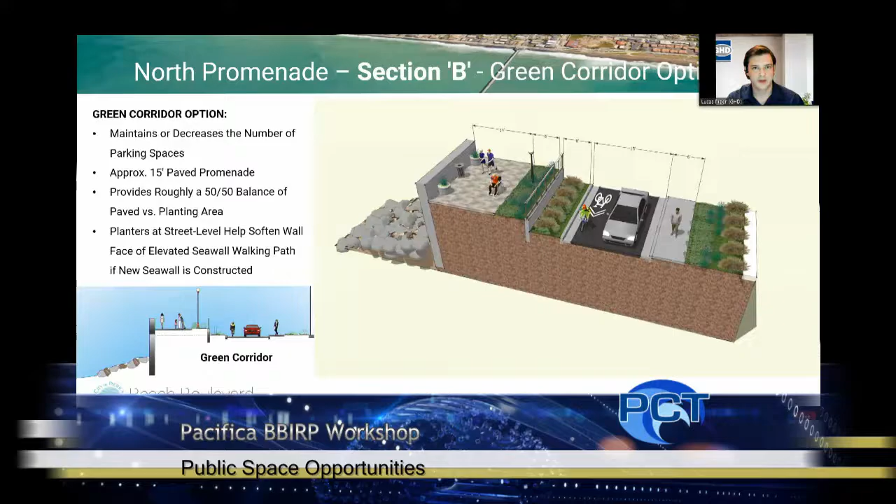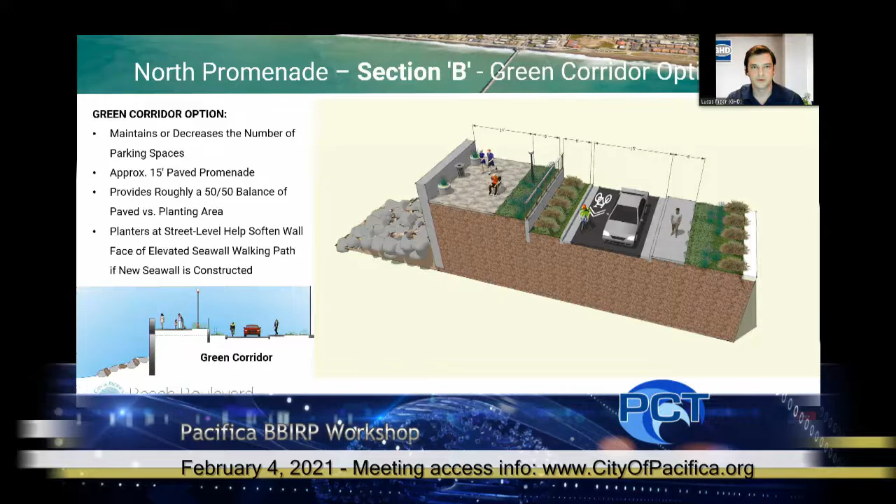The green corridor option is again similar to what I've already discussed, balancing planting and paved surface. But in this option, as you increase the wall height to reach the upper promenade, you'll notice that the planting can help provide buffer space to soften that vertical wall, while also providing balance between the planted surface and the paved promenade.

To summarize the options presented, I'd like to reiterate that each of these are examples of how the public space for the North Promenade can be handled. As mentioned prior, the preferred option could be a combination or hybrid of multiple options, balancing parking versus paved pedestrian surface versus planting space, influenced by the feedback we receive.

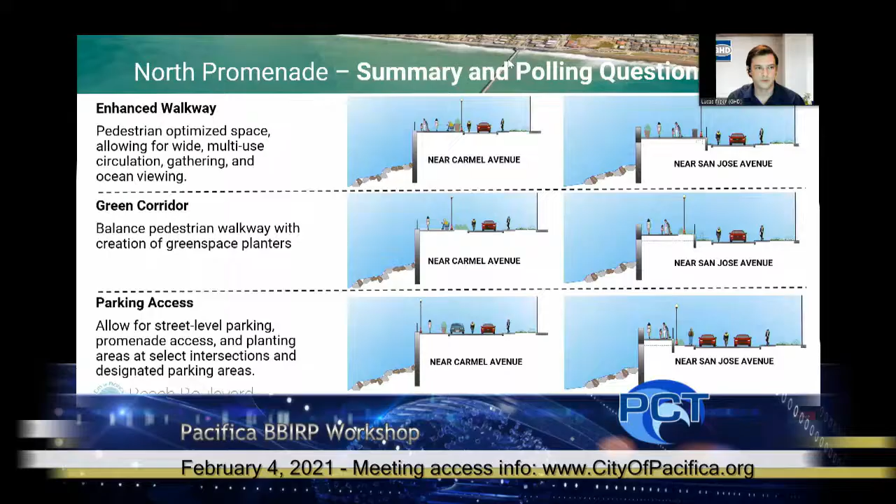So Kelsey, I think at this time we have a poll question where we can rank each of these options to see where we fall on the desired use of this Northern Promenade. Yes, exactly. Thanks for the prompt, Lucas.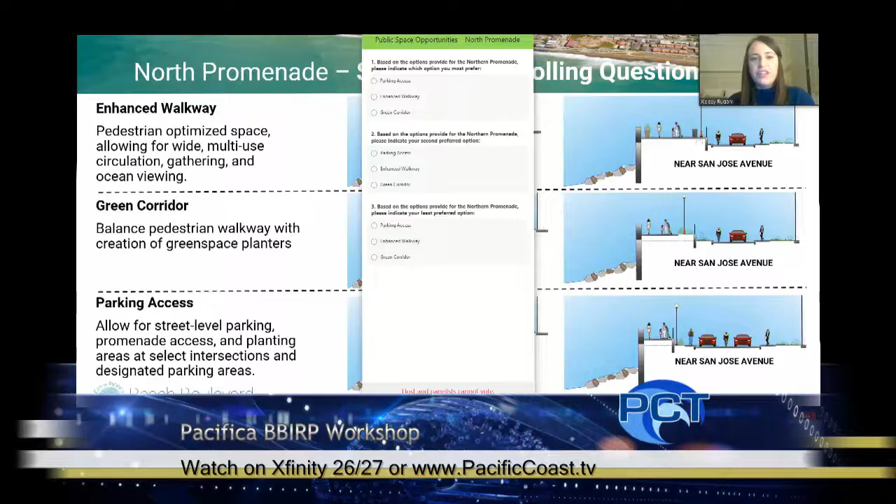So our next poll question, and we'll leave this visual up. As Lucas was sharing, he's defined three options: enhanced walkway, green corridor, and parking access, ultimately looking at hybrids and mixes and matches. To help inform where the team goes from here, the questions are asking general ranking or preference of these three. Please indicate which option you most prefer, which is second preferred, and which is least preferred.

We'll take 15 more seconds to do this one so we can continue on with the presentation.

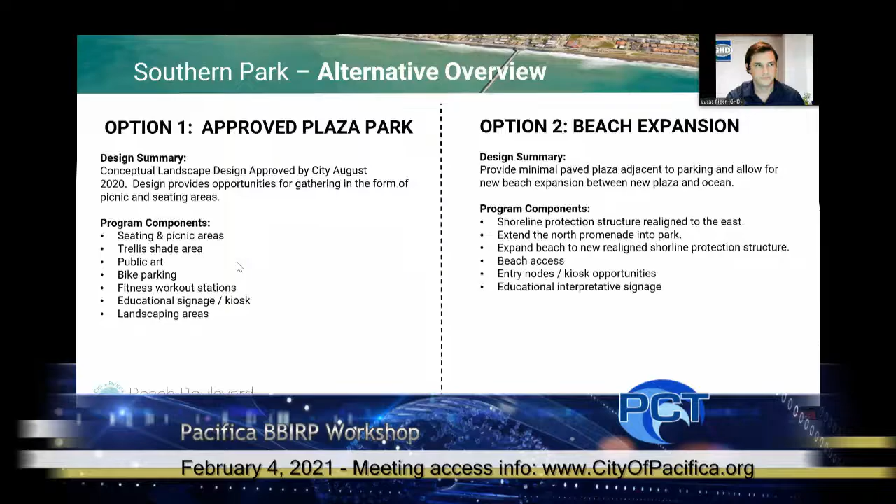If we go to the next slide, so for the Southern Park area, again, this is a plan that has already been reviewed and approved through the community. You'll see the plan and the cross-section C shown below. The red dashed line encompassing the project is the project limit.

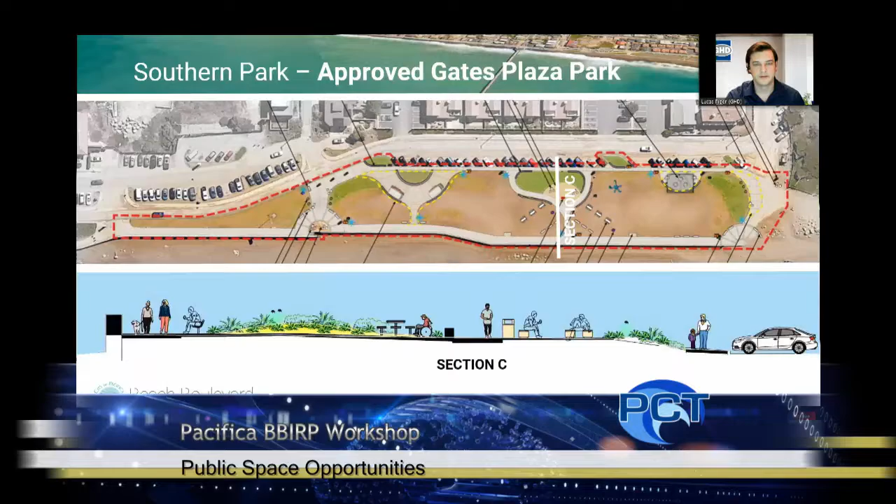As you can see, the existing shoreline protection structure originally was outside the scope of this proposed alternative and was being kept in place. However, now that we have the opportunity to potentially change the character or location of that protection structure, in this option it may mean that the structure is raised to provide more protection to the proposed plaza.

You'll see on the cross-section in the plan various amenities, including new paving, seating, barbecue areas, picnic tables, public art, concrete planters, workout and play areas, and then the gray and green large areas there are dune-inspired landscape zones.

So if we go to the next slide. This slide is showing the beach expansion alternative. This is a concept that was again developed, taking the opportunity to revisit this area and look at what can be achieved by relocating the proposed protection structure.

However, this could potentially come with additional maintenance costs, similar to the beach nourishment alternative under the shoreline protection. That sand would need to come from somewhere and then potentially need to be maintained if washed away.

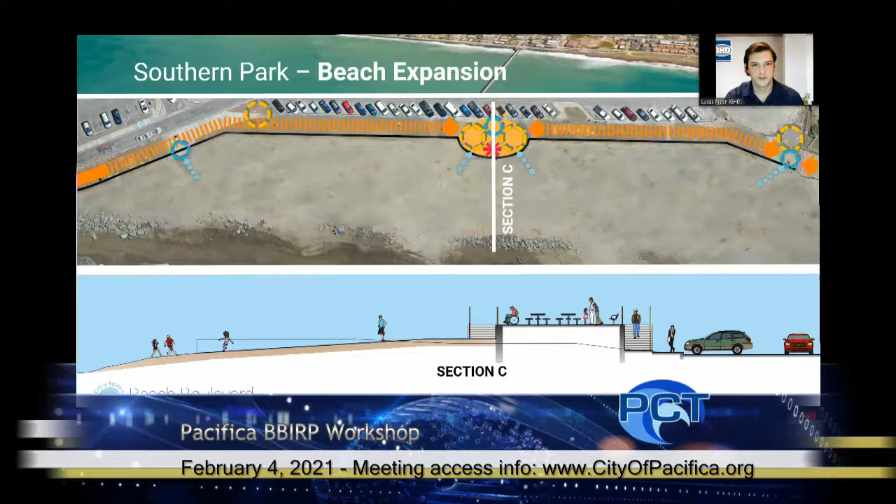So in this option, you'll see a lot less amenities, as it's dominated primarily by a beach expansion. However, you'll see on the cross section in the plan a few amenities, and it's really, as mentioned before, kind of an expansion of that northern promenade if we're going with the walkway enhancement option. These could include new paving, seating, picnic tables, and potential for art displays, potted plants, and then really it'd be focused on that beach access and the recreational opportunities provided by that expanded beach area.

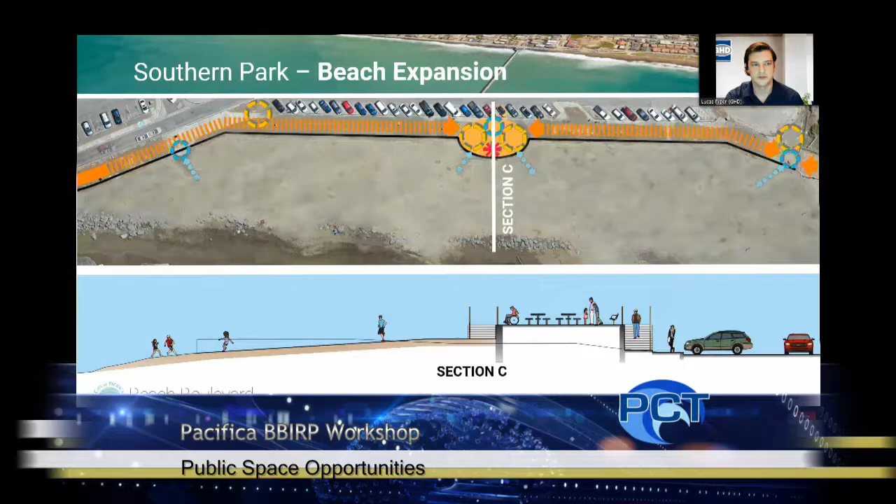So if we go to the next slide here, this is the final slide summarizing the two options that I just laid out. So you can see that they're kind of on different ends of the spectrum on how to handle this public space. The preferred alternative may be a hybrid, again, of these two options. For example, the shoreline protection structure may be only pulled back halfway to allow for a balanced plaza area, and then maybe half as much of what is shown for the beach expansion option.

The preferred use of the space, again, is based on the feedback we receive, among other maintenance considerations, longevity concerns, current site constraints, among other things. But similar to what we did with the North Promenade, Kelsey will be sending out a poll question here soon to gauge response on what of these two would be the preferred alternative.

Yeah, I can answer that. So what you're looking at is section B, I believe, where there's that elevated proposed seawall - if we're going with that option, it's extended past that upper promenade. The reason we're showing it that way is that promenade, or that seawall, would act as a parapet wall. You'd either need to have that seawall extended up 42 inches for protection, or you would need to have some type of railing system like is currently out there. By having that - if you zoom in on that slide - and allowing that seawall for protection purposes to be elevated a little bit higher and provide safety for that walk surface as a barrier, it allows that upper promenade to be a little bit lower in relationship to the street elevation. So you're kind of doing a stepping-up effect instead of having a larger wall in front of the cars that might seem a little bit invasive, with a railing on top of that wall.

And just to add on that - these renderings are just to get a sense of possibilities and what could go on out there. This isn't set in stone, so to speak, and there's more thought that needs to be put in here. It really depends on how high the ultimate protection needs to be. Once that's set in stone, there'll be more discussion on how to deal with possible elevation changes. Also, to Ryan's point too, these are showing kind of massings - massing vertical and horizontal. So that large slab of concrete for a wall is just to show that element, not to show what that element would potentially look like through the final design.

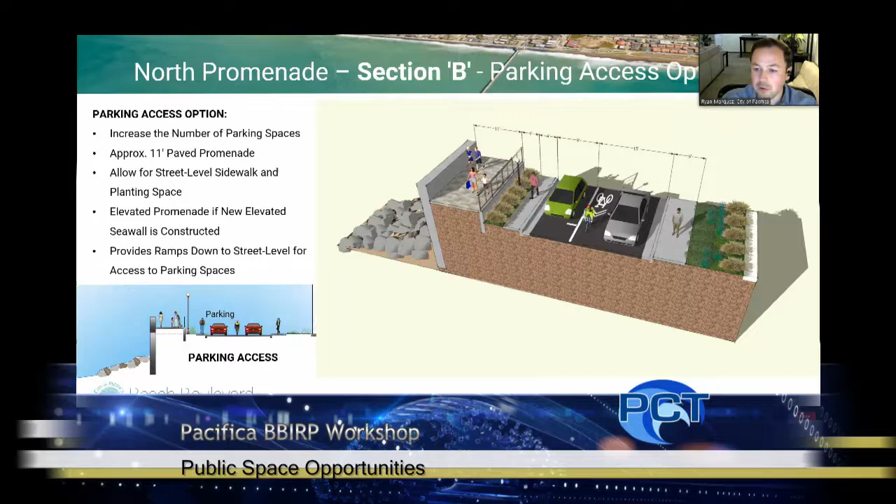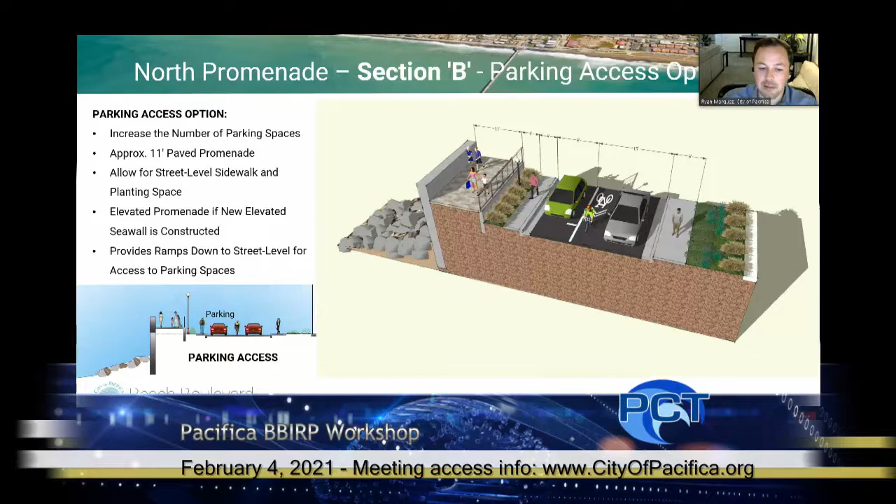Oh, it's the planting. Lucas, maybe you can touch on it, because that is important in this area. It is difficult to have plants survive, in terms of maintenance as well.

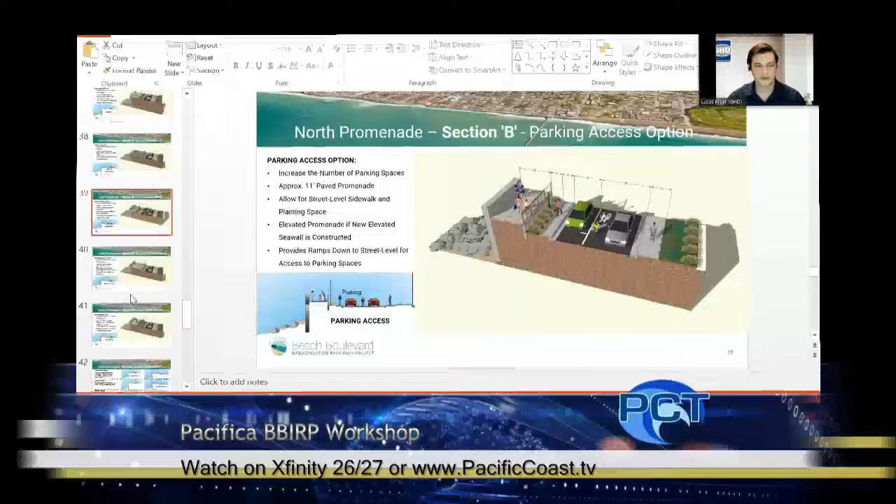That involves looking at what's there and trying to grow currently. It is a concern, and that's why the focus would be on moving away from any kind of ornamental planting, focusing instead on a coastal strand community planting—natives, dune grasses, and plants adapted to handle this kind of harsher wind and coastal environment.

And most of those options tie into one of the first follow-up comments regarding the wall elevation and the difference between that and the existing street elevation—that with that elevated area, it does provide some protection from the force of the wind by having the wall there. The planting areas, where a lot of them are lower set, more on the street side, have some shelter. But that would be a driving force in determining what type of plants can survive out there under the site conditions.

And then to follow up on that street level view: if the end result is to do a new seawall and have to elevate it to provide safety and protection against wave overtopping, then that will be a reality—the street will be lower than that elevated seawall. So it could very well be a condition where, if you're walking along the street on the inside, not up on that promenade, you could have some elevation blocking your view out to the ocean.